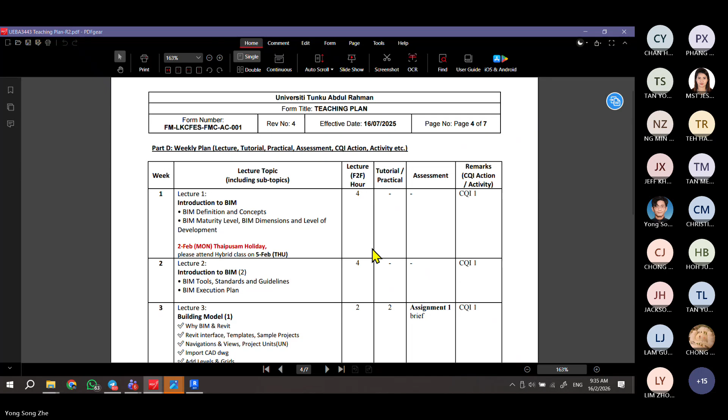Okay, so this is about our teaching plan. The topics are also written, I have arranged and written it in your teaching plan that is available in your Rebel. So today, week 3, here's some of the summary of some of the topics. Of course, sometimes you have some switching in between weeks.

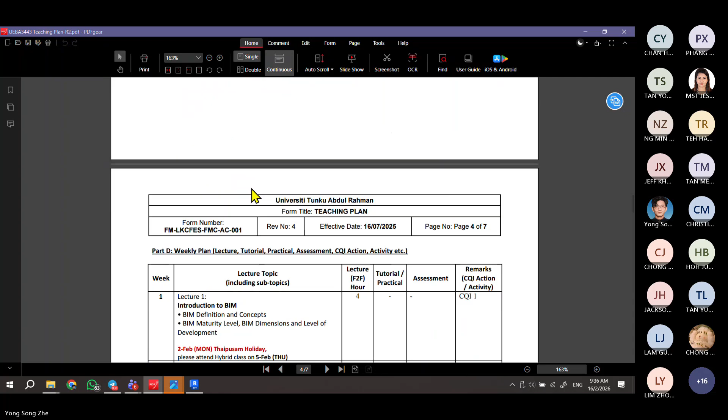So basically, in week 1, first class in week 3 and week 4, you learn about all the building basic modeling. Then week 5, you learn about roofing and more. Week 6 about curtain wall and system, the glass wall, and how to make louvers and so on. Then week 7, learn about staircase. Week 8 about site and topography.

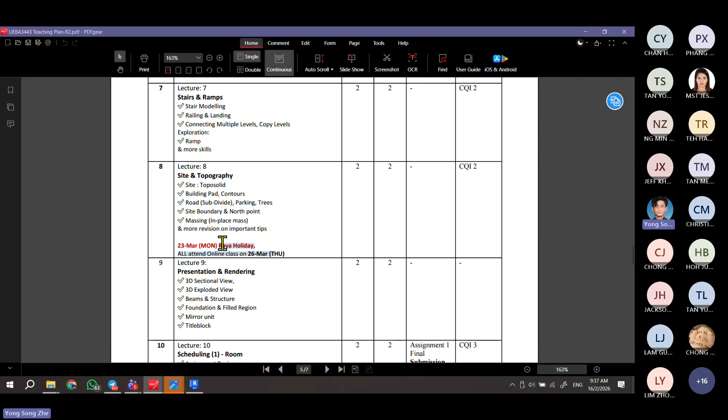So take note, in week 8 is our Hari Raya holiday for Muslims. So on that week, Monday, we are proposed to have no class, which is 23rd March, Monday. So every student on both Monday and Thursday groups, please join the class on 26th March. We will combine on Thursday online for both, similar like today, but combined on Thursday online. Please take note. And then week 9, we focus on presentation and renderings, which is on graphics in Revit.

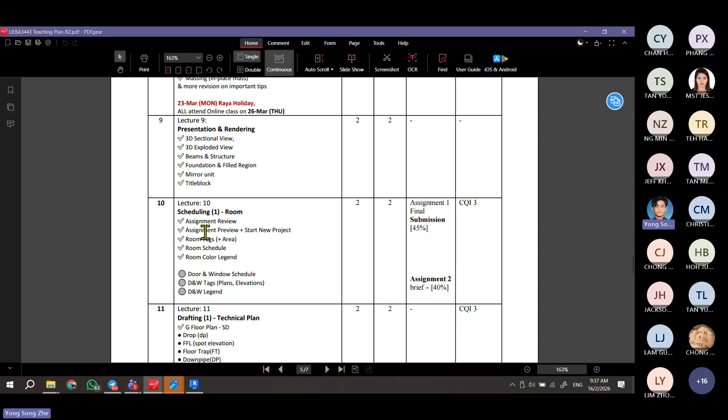Then week 10 will be starting your assignment. It's the end of assignment 1, it's a submission. And then we'll be starting assignment 2. Assignment 2 is about the technical part, documentation, technical drawings. So we'll be starting on scheduling.

Making all the tabulations of the data. Then week 11, your technical drawings, your plan, for submission drawing. And then week 12, other tabulations, your schedules, door and window schedules, the templates.

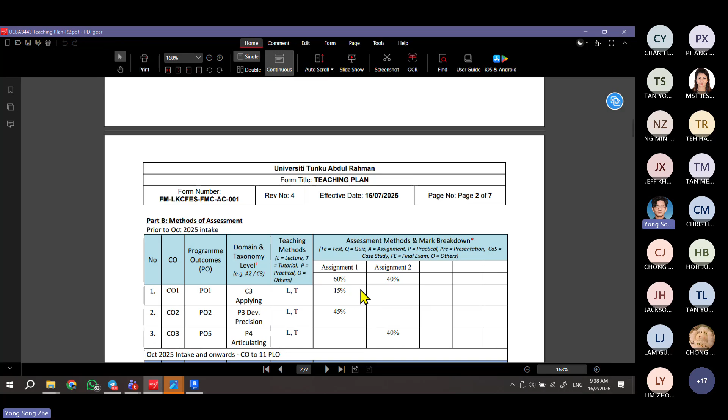Then week 13, about your construction details, and so on. Then will be your submission for assignment 2. So in total, you will have two assignments in this semester. Actually it's one, a good thing is it is continuous. You don't have to start everything from nothing, from new.

So assignment 2 is a continuation of assignment 1. But assignment 2 gives you an intro first, it is about technical drawing. So assignment 1 is more about design and modeling. Assignment 1 is broken into 2 parts, 1A and 1B. 1A carries 15 marks, 1B carries 45 marks.

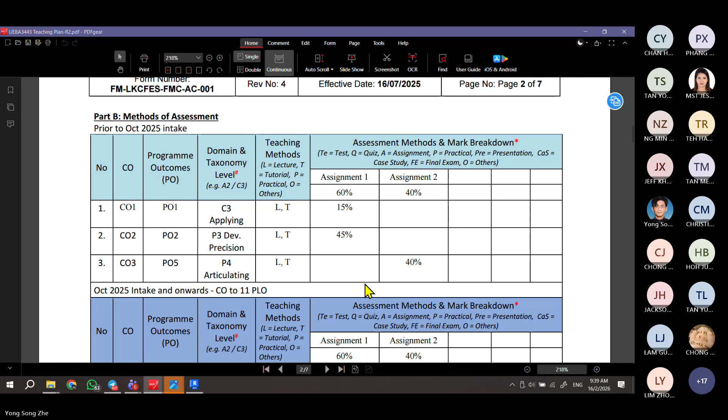1A is like a progressive marking. So I'll share more about the assignment brief later.

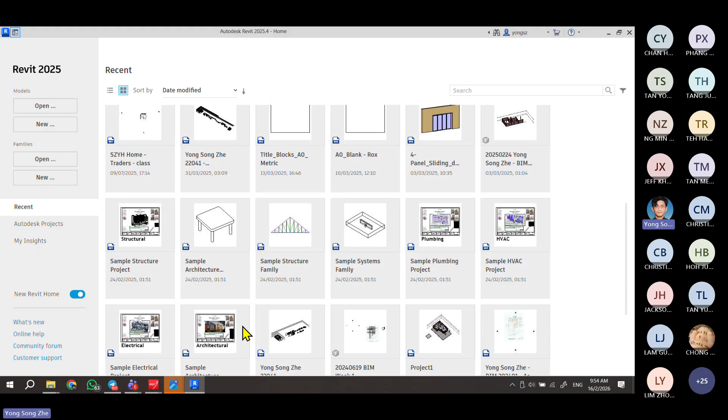So here I will show you some quick examples, a preview of what we can do in Revit. This is some work done by my previous students, your seniors from years ago. This was 2024, two years ago. So in Revit, we can do...

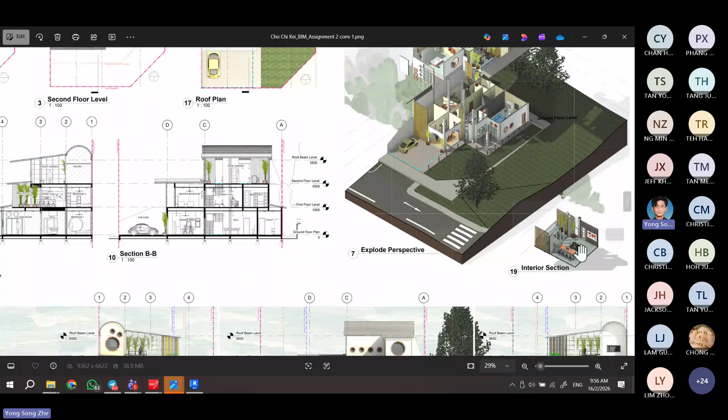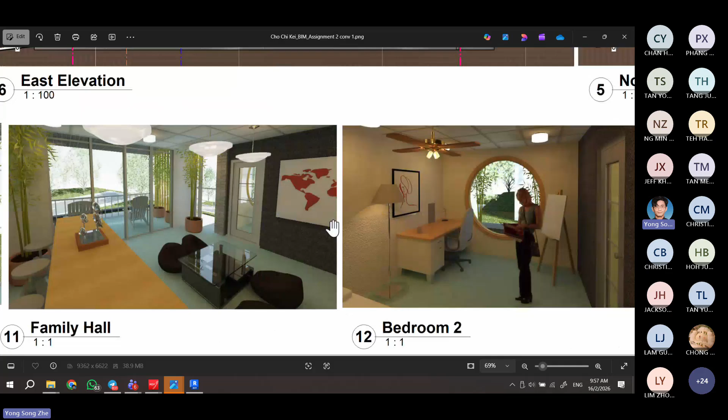This is what you learn in this course this semester, using Revit to produce this kind of drawing and 3D, including perspective renders. All this is rendered in Revit itself, it doesn't require any other software. No need for Photoshop, no need for SketchUp, no need for AutoCAD, just Revit in this case.

Another student's work here, an award-winning student. He won the Nippon Paint Asia Young Designer Award. This was one of his submissions during the BIM class, for our BIM subject assignment.

3D sections, exploded diagrams, you even can do the board arrangement, some board poster composition, the board arrangement, your poster A1 size board, all in Revit. So probably you don't need Photoshop. It has the basic functions. But of course if you want advanced editing, you go for Photoshop and others, but that's not necessary.

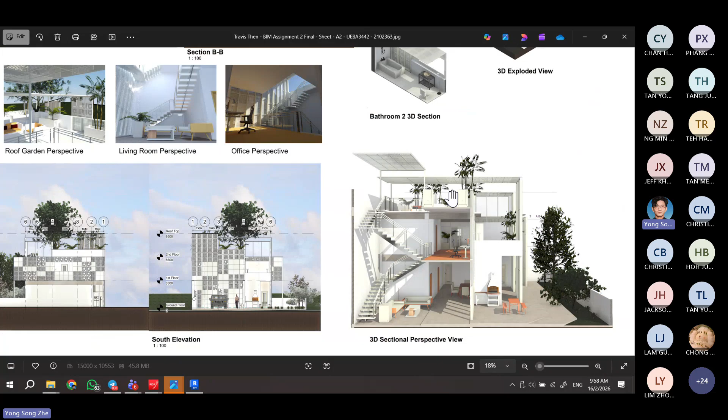Another student, also award-winning. He designed the facade, something quite outstanding, quite unique, different from others. 3D sections with good lighting, you can see. With design sense, it's not only a typical model, typical house with 4 walls, but you can see the space quality and so on. Very nice design facade.

There are many more good examples. I will show you in the upcoming classes when we come to that project. And this is just an overview.

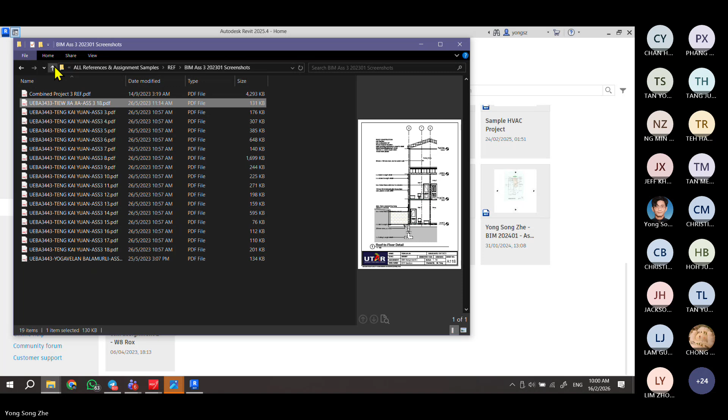For your assignment 3 later, from week 10 onwards is about your technical drawings and so on. This is a quick overview of what we will do from week 10 onwards: technical floor plans with all the specifications and the technicality of it, the symbols, the labelings, multiple storeys, roof plan, ceiling plan.

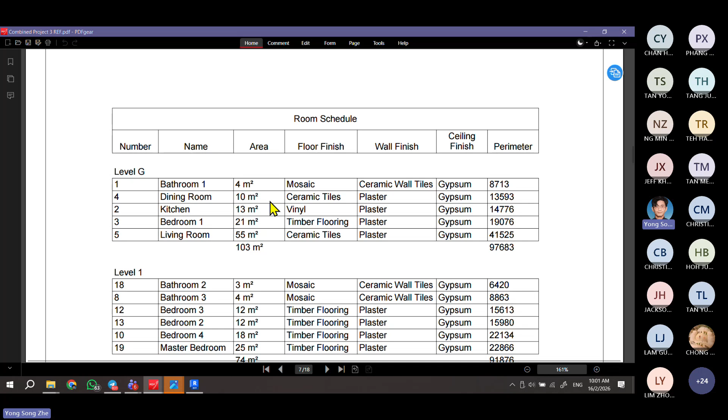We can do diagrams to explain the area, the room. We will be able to generate the room schedule, or the schedule of area, from our 3D model. So it means we don't need to type this and measure it one by one. In a few clicks it will generate this table, and the table will always stay updated based on your 3D model. You don't need to update the number manually.

Also schedules like door and window legends can be generated to tabulate the quantity of doors, windows, and all the components. Section, quite good sections, technical elevations, and you have a roof to floor detail, construction detail. We will do this by the end of the semester, around week 12.

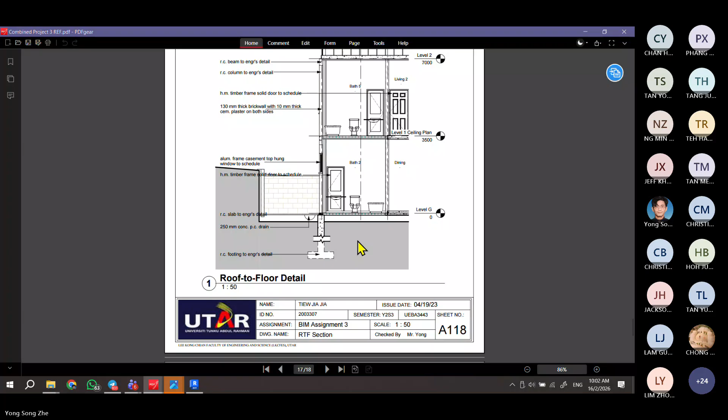Another example from another student: your roof to floor detail. All this is actually one project, one same building at one same site, so we just focus on different parts of it. Other detailing as well.

This is the way I like to share with my students, by the end of the semester of this course, what you will learn. Maybe even more than this, better than this. This is just some of the examples.

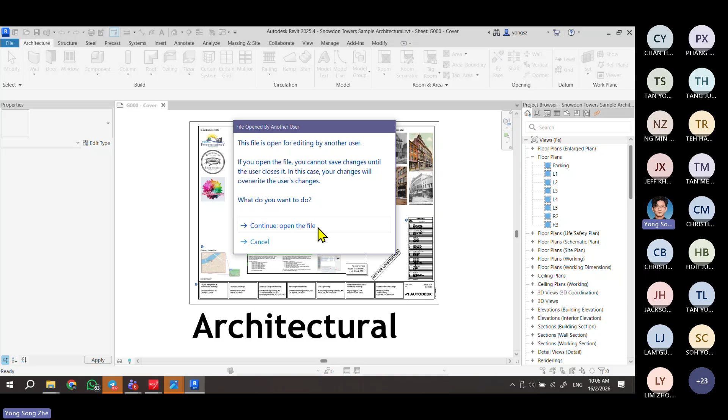It is a compulsory subject for architecture students in year 3. From 2025 onwards, based on industry visitation for accreditation, I was informed by the department that the civil engineering department wants to open this course as an elective subject for civil students also, because the external examiner or panelists asked why there is no Revit course, BIM course, for civil students.

So now, every semester, we open certain limited slots for civil engineering students. Our course will take examples most of the time using architecture projects, from the architecture perspective. So for engineering students, it will be fruitful, I believe.

In this semester, in your elective subject, you can have a different perspective. You will learn from this, and potentially you have more opportunity in the future. Maybe you're going to design partially or design your own project, maybe in future you get involved in some design projects potentially, and then you have the experience.

So from this sample project provided by Autodesk, we will just use it for testing. Firstly, I'm using my mouse to move around here.

If you look, you see you have a project browser. This is the project browser. So I will click and drag this, click and hold this, and drag it to the right hand side and release it, and then it will snap to the right hand side.

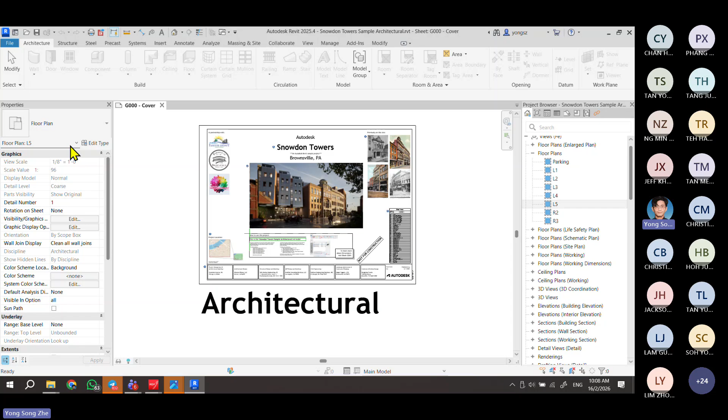Also, this is my layout, you can follow. So this is what if you have missing properties and project browser, where to find it. Let's say your project browser is missing, your properties is missing. Where to find it?

Go to View. You can see User Interface, this one near the last, almost the last button, User Interface. Then you can turn on Properties, there you go, and you can turn on Project Browser, there you go. So all the tools here at the top bar, we call this a ribbon.

Let's say your ribbon is missing. How? You go to View, but you cannot see the tools. So there's an up arrow icon here. You can click it a few times until it shows up all the tools like this. For me, I will keep this layout, this interface, so it's easier for you to pick what tools you want, and easier for me to show.

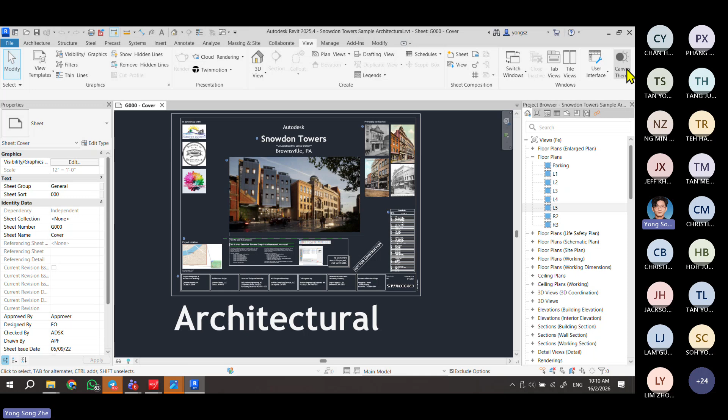Then we have canvas theme. Some students, yours is in a black color mode. So if you want to switch it, you can switch it here, canvas theme. This is just changing the canvas itself, black and white. If you want to change all the tools to a dark mode, you go to another place called File, Options, and then Colors.

This UI active theme, you can change. Let's say I change to dark. You can switch, maybe you feel dark is too dark, maybe you feel afraid of dark, then you switch to light version. Colors, like that.

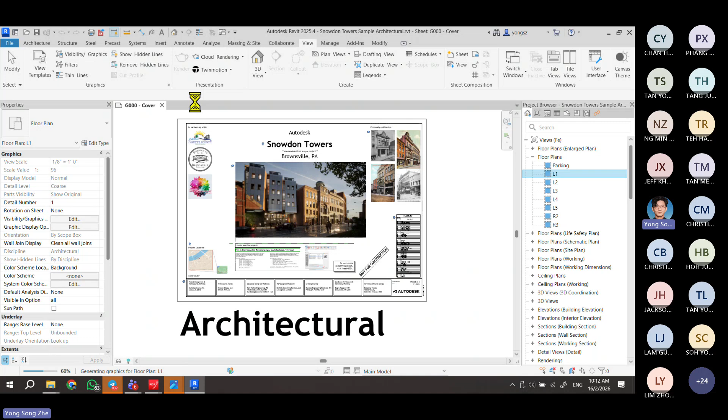So from the project browser, you will see, let's say, floor plans. You can, let's say I try with L1, so I double click this. It will open up a new window to show L1, or Level 1. This is about floor plans. I can expand or minimize this. You can try with other views.

Also, when you look at 3D views, you can open the last one, this one in the bracket, 3D in the bracket. This is the overall 3D view. Another shortcut to go to the overall 3D view is this button, the default 3D view at the top, you see a little house icon. So you can click this. Let's say I close this, I click this little house, it's a shortcut to go to the overall 3D view.

Okay, you will see other views you can try, like looking at sections, detail view, rendering, and so on. Okay, this is section.

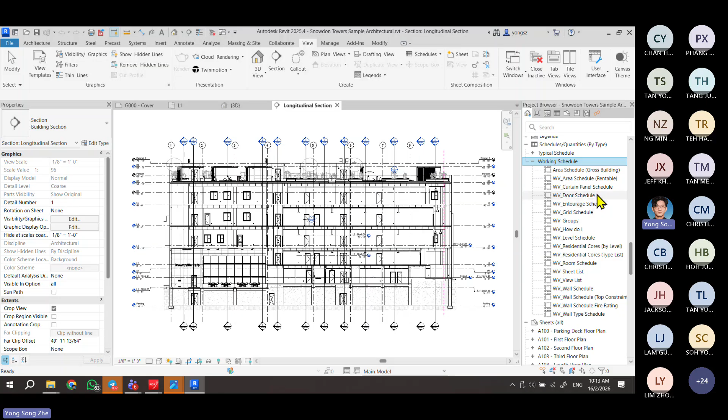Okay, you can look at the schedule also, like tabulation. Let's say area schedule, or door schedule, or the data, room schedule. Okay, and the sheets. This is about putting them, for the sheets, putting them in the A1 size paper, with the template, with your office template and so on, company template.

Okay, this is in A1 paper. So all views can be reached at the project browser. Okay, this goes to all the views, including, let's say, you have rendering views also.

Okay, rendered view. So let's say you have on many windows, you can click this expand button to see other windows that are hidden. Okay, if you have too many and you want to close all, you can just close. It doesn't matter, it will not close the whole project, you just close this view.

Just close this view. If you find that closing it one by one is time consuming, is there any way to close all of them in one click? Just one click to close all of them. Any way to do this? The answer is yes, you go for this.

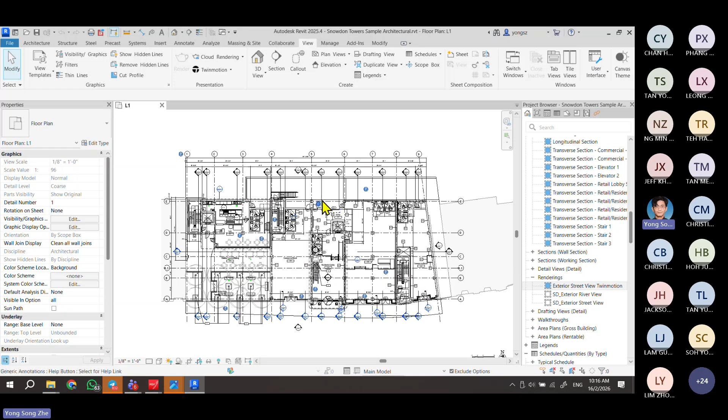Okay, so now let us go to, when I'm in floor plan, I use my middle mouse roller to zoom in and zoom out. To zoom in and zoom out, middle mouse wheel, the roller.

Okay, then you can hold your middle mouse button to drag to the left, up, down, left, right. We call this pan your camera. You can try this in 3D view also. So how to go to 3D view? I click this default 3D view at the top. Okay, so zoom in, zoom out using middle mouse roller, and then click the middle mouse to pan left and pan right.

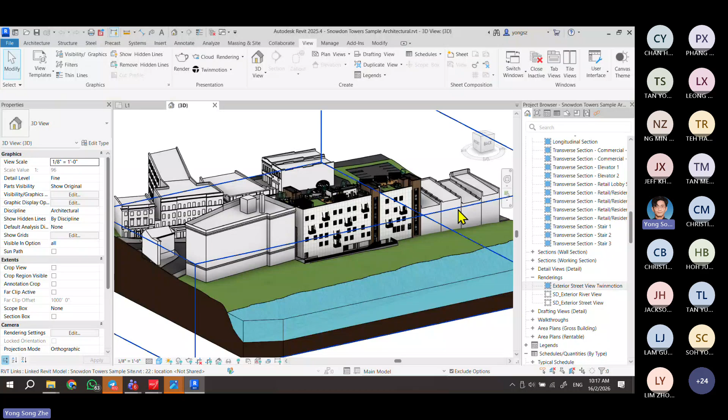So how to orbit, like move your camera around something. Firstly, you select one thing first that you want to stay at the center of the movement. Then you can hold the shift button on your keyboard, and with the middle mouse wheel, you drag it, the middle mouse wheel with shift together. Then you can orbit around. We call this orbit, you orbit around something.

Okay, let's say I pick one of the components, let's say a tree. I pick one of the trees. Okay, then I can orbit around the tree now by holding Shift and the middle mouse button.

Okay, now let's type UN on our keyboard. UN, United Nations, okay, UN on the keyboard. It is a shortcut to the project unit. So every time, as a good practice, we will check our project unit, whether it is using the correct project unit. Okay, so currently this sample project is using feet, not using mm. And so just for your information, for our project, we will use mm.

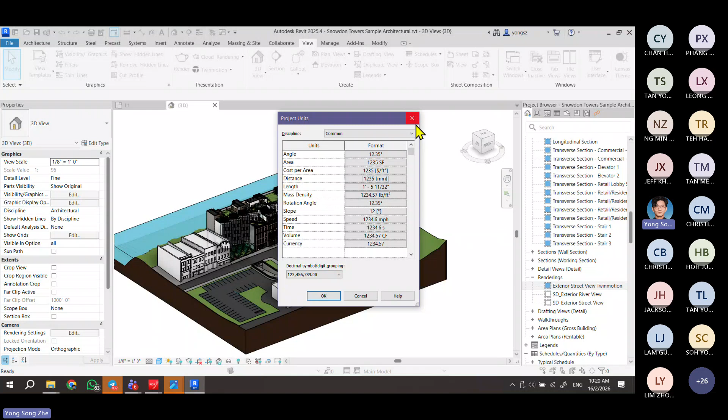In future, you can change it here. Okay, you can change, let's say, distance. You want to change it to mm, you can do it here in the future. Okay, decimal place, symbol is available here in UN, the shortcut key is UN. So during the class, I will share with you some of the shortcut keys that we always like to use, so you can take note, write it down for your future, you can use it, it's faster. UN, project unit.

Okay, so now I have, in this case, I will turn on my 3D views and my site plan view. How to go to site plan? Okay, you will see at the project browser here, there's floor plans, and in the bracket, site plan. So you open the site plan.

You want to test to move something and to split our screen. So other views you can close it. I just want to turn on site plan and the 3D view, two of these. Site plan and 3D view.

Okay, so for the site plan, you can turn on, currently you see it's just black and white, right? Okay, how to turn on color? You can go to the bottom left here, at the third or the second symbol here, second icon here. You click this.

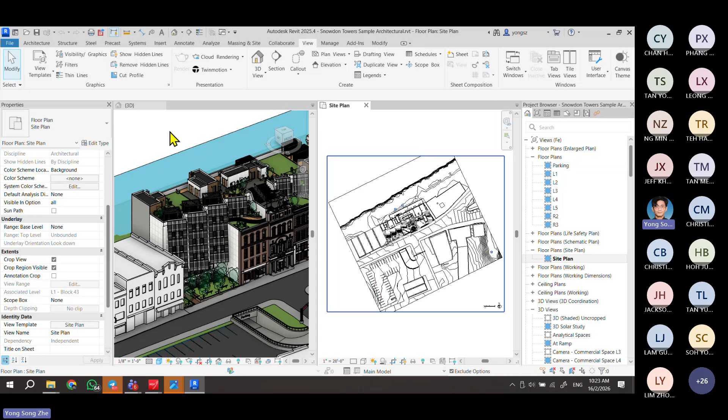Once you have opened this, maybe you have zoomed in too close already. So how to zoom up or zoom fit to the screen? Let's say you have zoomed in too close, or zoomed out too far away. How to zoom fit just nice to the screen size? The answer is double click in that window, double click your middle mouse button, then it fits to that window size.

One more time, I'll show an example. Let's say this drawing is too far away. It will zoom fit to your window size when you double click your middle mouse button on it. It is same as ZA on your keyboard. Z for zebra, ZA. ZA is the zoom fit shortcut key.

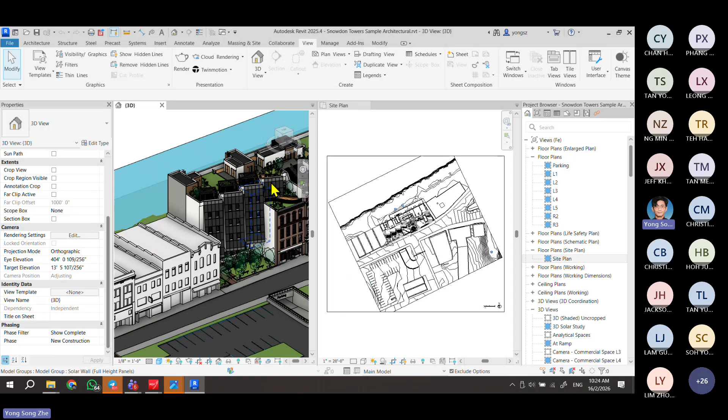Now I try to select one of the trees. When something is selected, it will be highlighted in blue. So for this tree here, I can zoom in on the site plan.

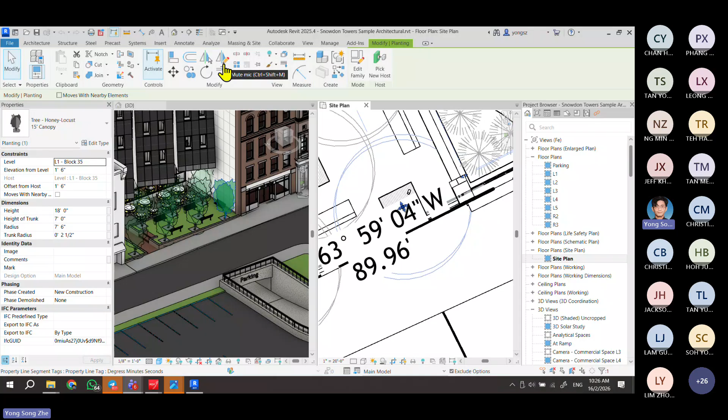So when I selected these trees in the plan, you'll see it's highlighted in blue also, in this circle line for example. So what if I move it? I move it in the plan. What happened in the 3D? I move this towards the road, so you can see in 3D it updates also.

What if I move it in the 3D? I move it in 3D, and in the plan it will be updated also. So this is synchronized. I will not move other things first.

Because we will cover this in a future class. So when you select anything, it will show its properties specific to that thing. Let's say I select the whole...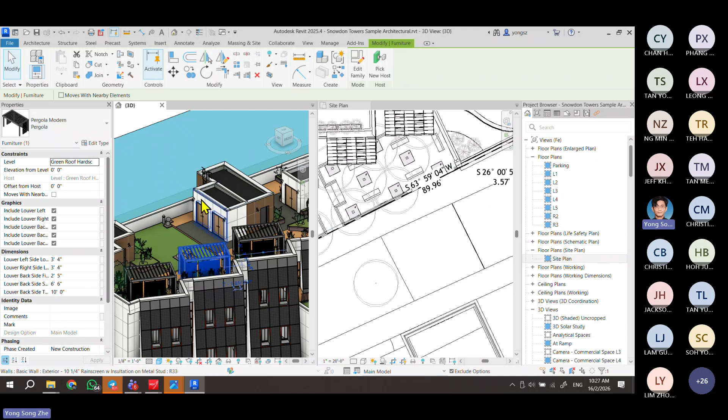I select the canopy, the pergola, so it will show the properties of the pergola. I select the wall, it will show the properties of the wall, depending on what I've selected. So the properties keep changing. I select the trees and the shrub, it will show the shrub.

When I select nothing, I just click the empty space, or press escape, I select nothing. Then it shows the properties of this view. Let's say the active one is the 3D view. When I click this, this is the active one, then it shows the properties of this site plan view. When I'm selecting nothing, it shows the properties of this view.

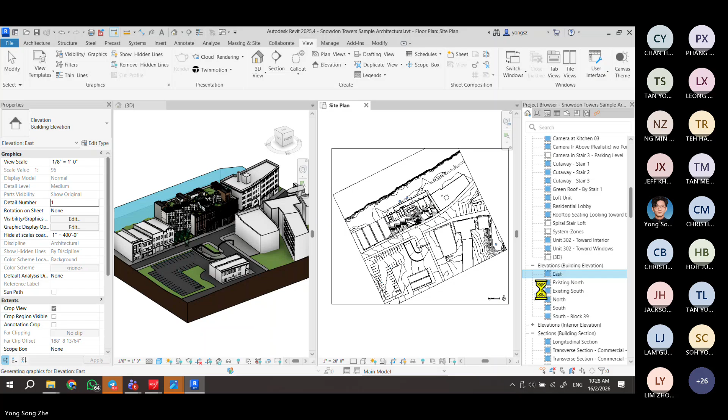I'm trying to open another view now, let's say the elevation view. You can see it open up here. If you want to combine them, don't want to split it, you can click TW. I will ask this in next class, so remember to answer it fastest next class.

So yeah, we see the leveling line and so on in the elevation view.

So next we're going to start a new project, a blank project soon now. So we no need to save this, I can close this.

Before we close this, one more thing. Let's say I'm in my 3D view. Currently it's a color view, you can see the color. So what if you want to change it to black and white?

You can look at the icon I introduced just now. The second symbol here is a cube. You can click this and say hidden line, then it shows just black and white.

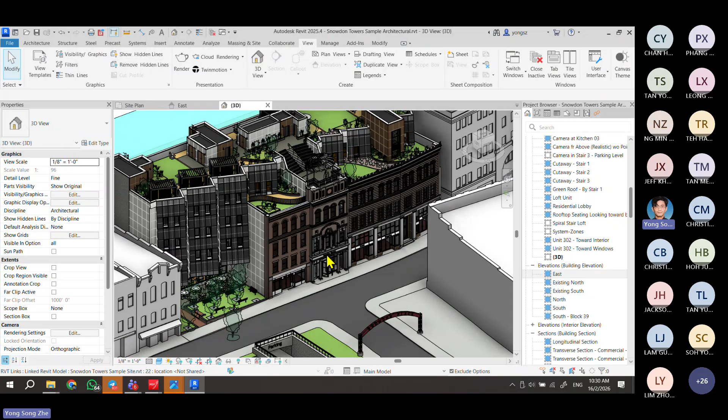If you go for texture or realistic, if you give more realistic texture to your material, like maybe your brick, you can see when you zoom in, you can see the texture of it. Maybe your concrete or your grass, you can see the texture of it. When you are using texture, your timber, flooring, and so on. This is texture view.

And you can switch it here for your 3D views. You can turn the shadow on or off on the fourth icon here. Currently it's on shade. I think the shadow you can try.

This is shadow on. You can see there's darker tones of shadow here. This is shadow on, and this is, I click this once again to turn off the shadow. This icon.

Okay, not the third one. Third one is sun path. If you accidentally turn this on, you can click it once again to turn it off for the sun path.

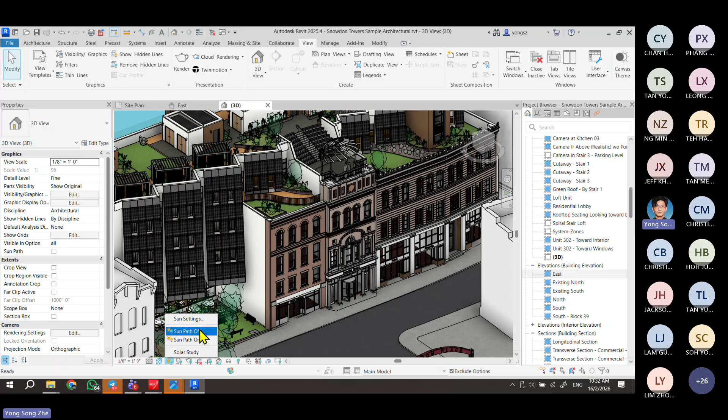Okay, now we don't need to save this. I will close off them. To close all inactive views, we can click this. And then we click this once more to close the project. Okay, I say no.

So now we'll start our new project. I will send you an image here. Send now. Okay, I've sent you in the Telegram group an image, a JPG file image. So everyone, please go download it because we're going to import this drawing into our Revit to start our project, our assignment from nothing.

From blank, from a new project. Okay, so I have closed the project just now. We are here. So now let's start with, we go to new, you create a new project. Choose the models, new models, not the family. Not family. New project, new models, this one.

Then under here, new project, you go look for the architecture template. If you did not find the architecture template, you can look for the default template or metric template. Metric, make sure you choose the metric if you don't have the architecture template.

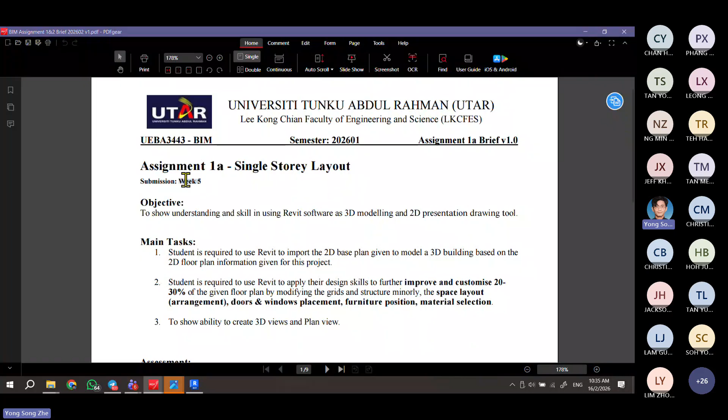Okay, so here I introduce to you assignment 1, part A, part 1A, assignment 1A, the first part. I will share this brief with you in the group later. So for assignment, you have in total assignment 1 and assignment 2, two assignments as I introduced just now. So for 1 you have 1A and 1B. 1A is a progressive marking back, so it will be assessed, I think, in week 5. If no issue, then assignment 1 is about making a single story layout.

So what is that? So you know that when you come to work in the industry, one of the projects you might frequently be involved in is residential projects. We know that everyone is aiming to buy a house and so on. Someone even has more than a house, a few houses. So housing project is one of the most highly demanded. We will learn on this, get introduced to this, get involved in this kind of project, housing project.

So 1A is doing a single story layout first. Student is required to use Revit to import the 2D base plan given, to model a 3D building based on the floor plan given. So the 2D base plan is the one I shared in Telegram.

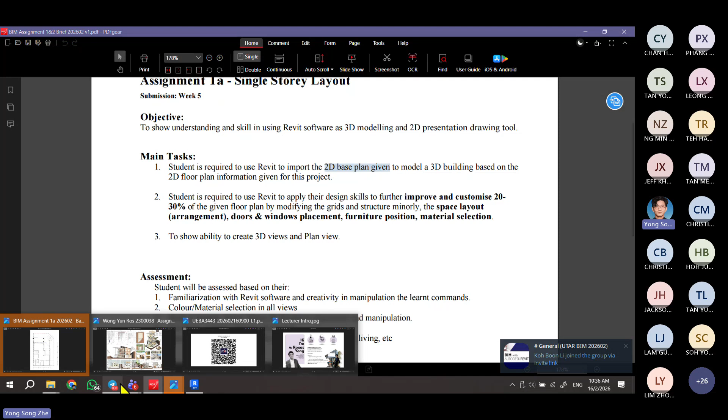This one, the 2D base plan. This is the base plan. This is unfinished drawing, done halfway, maybe not even half. It's done partially only. So you will continue it, like connecting the lines, continue the drawing, continue the design.

So point number 2, student is required to use Revit, take note, use Revit, to apply their design skills to improve and customize 20 to 30% of the given floor plan. So you are required to improve or continue to develop this unfinished drawing, like 1/3 of it, almost 30%, 20 to 30%, including by minorly modifying the grid and structure. So you need to improve the space layout, the arrangement of the space. You're going to decide like where's the kitchen, where's the toilet, all the necessities of a single story house.

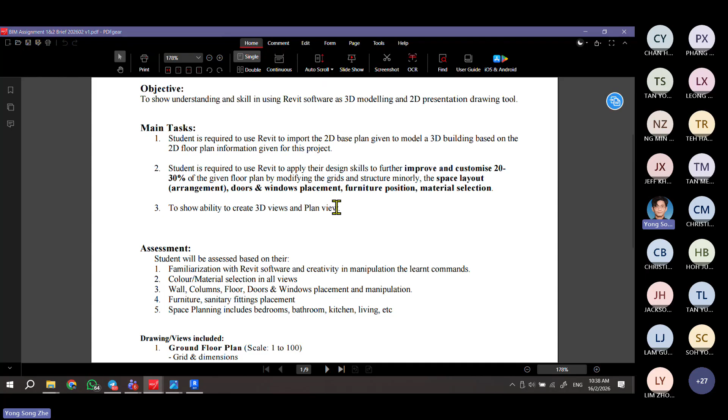Okay, you have bedrooms, living room, dining area, and so on. Space layout, you're gonna define it because in this plan given, it is not defined yet. So it's left to you. It gives rooms to you to define, and then positioning the furniture and selection of material. This is included in the main task. Then you create 3D views and plan view to show your idea, your design.

So students will be assessed based on your space planning, like positioning of your bedroom, bathroom, kitchen, living area, and so on, or the necessity of a single story house, and then your furniture placement, and your wall, column, floor, door, and window placement, and your customization, your manipulation of it. Does it follow the proper size and so on? And then the color and material selection of your views, your 3D.

So these are the things that you're gonna deliver. So we will assess this. You will submit this by week 5. Okay, so you have 2 to 3 weeks time, by end of week 5.

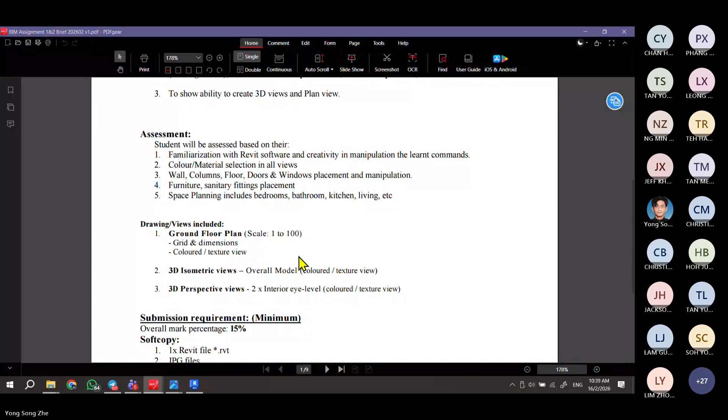So you will submit your Revit file in the format of RVT. The proper format of Revit file is RVT. Take note. And the JPEG file, the image file of the 3D views. I will talk about this in the upcoming classes, isometric and perspective views. I'll talk about this more later.

The rendering is not required yet in this submission, so it doesn't have to be realistic visual and so on, no need first. The roof and ceiling is not required yet in this submission. Fencing, site context, landscape is not required yet in this submission. That all this will be in the second part of the assignment, Assignment 1B. Assignment 1B will need this. 1A, all this is no need first. Okay, in these reminders, take note.

Okay, so let's go to our base plan to start. Make sure you have downloaded this.

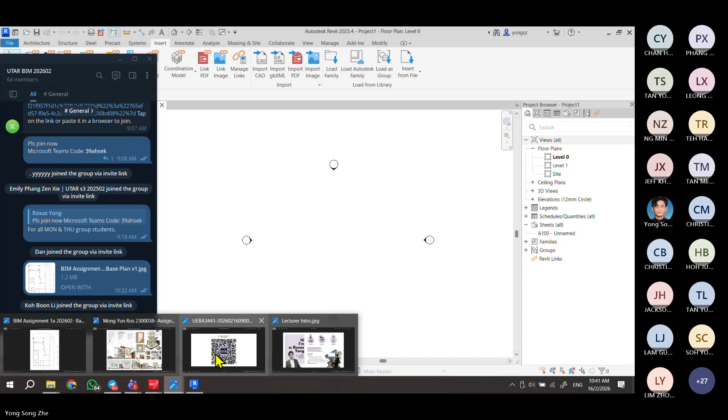Firstly, I will go to Insert, and then Import Image. So how to import a drawing, let's say it's in image format, into Revit, like this image drawing. Imagining you are working in a company, maybe during your industrial training, or when you get graduated.

So in the company, the boss tells you—let's say boss says, hey Junbin, for example—so we got a project, a Revit project. You know Revit, right? I saw in your CV during the interview, you say you are good in Revit. So we got a project. The client have the building partially done. Now they want to do the project, it's kind of abandoned. Now they want to continue the project, continue developing it or renovate it. So this is the current measurement we have, or current layout we have, done partially by other colleagues maybe last time. So now you're going to continue this project to finish it in Revit.

So this is the clue. This is the drawing that was given. So we're going to continue from here. So here comes the beginning of this Assignment 1A. This is a very realistic project, practical. So make sure you equip with the skills and you come to work soon in the future.

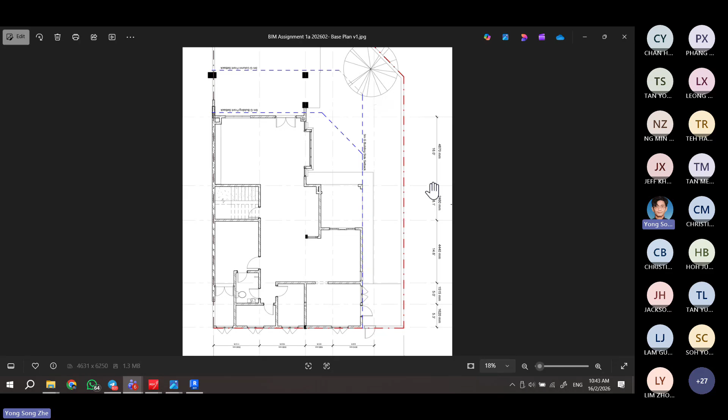So the measurements are given, so you can do minor adjustment, as written in the brief, 20 to 30%. So how to import it into our Revit? First step, let us go to Insert and then click Import Image. Then you go to find where have you downloaded the file.

Okay, I know this is my base plan. So I will copy this address. I click here, copy this address, and I paste it here. I click enter, so it brings me to this folder. And then I select the image, the JPEG image, BIM Assignment 1A 202602, this semester intake, and then base plan version 1. I say open. Then you can place it, click to place it somewhere near the middle.

Okay, then before you start anything, go to type UN on your keyboard, check your project units. UN, for United Nations, is shortcut key for project units. Check your distance or length, let's say length, whether it is in mm, correct. Yeah, decimal symbol is optional, up to you. Area is in meters, square meters, with the symbol. Others can remain, just check, is it in mm or meter. We want to use the metric system. We don't want to use the imperial system, we don't want it in feet or inch.

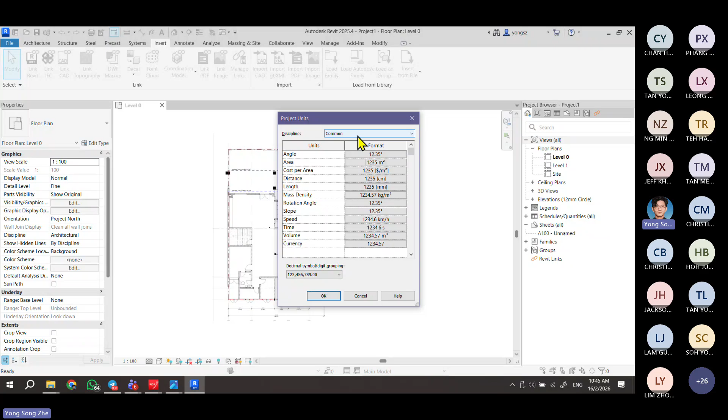Okay, after you check project unit, then what is next?

Okay, we want to start to trace or model it.

But however, when we want to trace or model it, we will find that we don't know whether this image, because it's a JPEG image, whether the size is correct, the scale is correct.

Because this depends on the resolution. If it is a HD image, then it's very big. If it is a low res, then it's small.

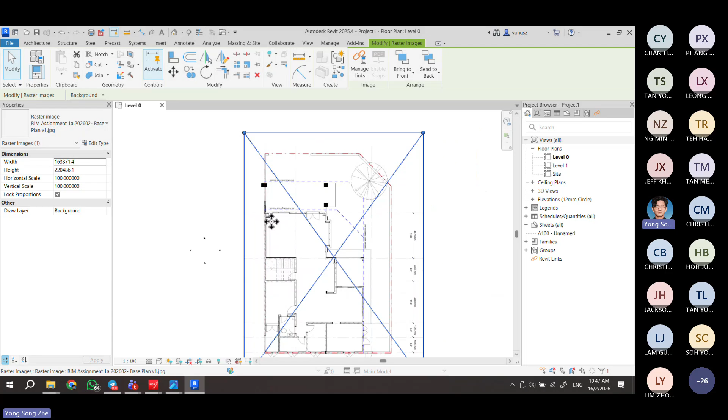So now we're gonna scale this image, how to scale it. You can just ignore the bubbles first, this icon. I drag it to the side. I want to scale this image, make it correct to scale first. So how to scale the image?

Okay, firstly, I will take one of the longest measurements for reference. Let's say this 13826 is upside down. So I want to draw a line that is truly 13826.

This is step number 1. Draw a line that truly follows the measurement. Okay, how to draw a line?

You use a command called DL, donkey donkey line. DL stands for detail line actually. DL is used to draw a 2D line.

A 2D line is the same as if you go to Annotate, then detail line, it's the same thing. The shortcut key, as you can see in the bracket, is called DL.

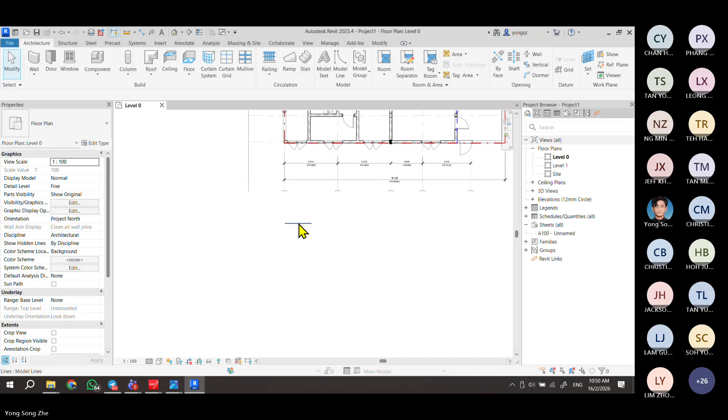Okay, then I move this to the beginning point of this. You can use your arrow key, the up, down, left, right button on your keyboard, the arrow key, to move it.

Okay, so I want to align the starting point with this line, as close as possible.

It will not snap to it because this is an image, but I can make it as close as possible. So you can see the green line a little bit is actually here, from here to here, the green line, my model line or detail line.

Okay, so I have done step number 1. I drew the line and positioned it here. The starting point is aligned.

So now step number 2. I will go to click Modify under the Modify tab, this one. Then I click the scale button, this one.

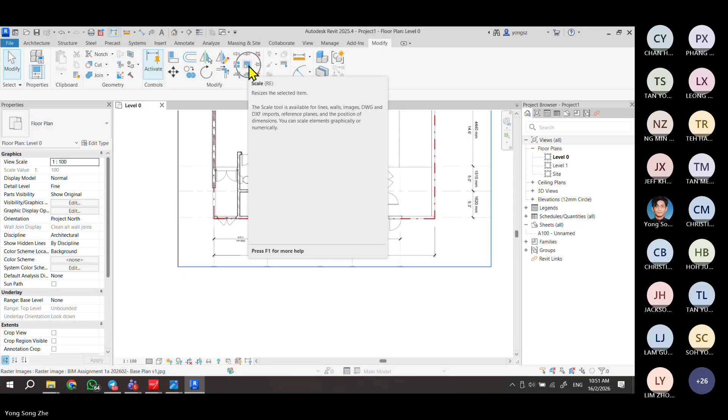Somewhere near the middle here. So I click scale, and then...

You pick the starting point. Okay, sorry, you pick the image first before you click the scale button.

So I select the image. The image now is in a blue bracket. Okay, then I click the scale button.

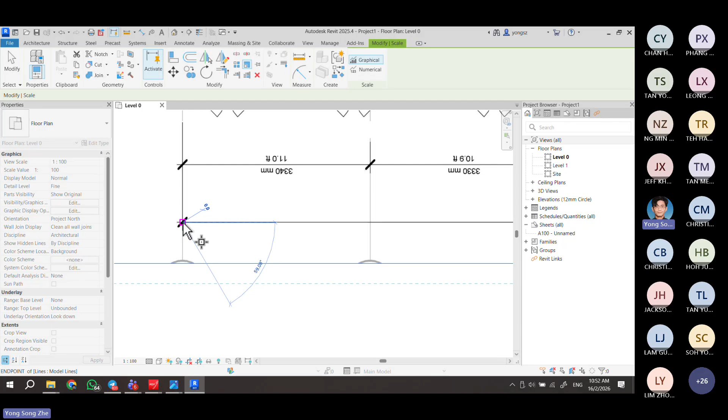Okay, then we choose the starting point of the line we just drew. I click here. Then I click a second time where it stops, based on the image.

Okay, based on the drawing given, it stops here. I click this for the second time, and I click for the third time. The last time is the actual measurement, 13826, here.

My green line actually stopped here just now, so it will snap to it because this is a line I drew in Revit itself. Okay, so I click here. So 3, 2, 1. So this happens.

Now the drawing is scaled down, reduced by its size. I press Control Z - before is this. After is this, okay. You can use Control Z to undo, Control Y to redo.

Now when I select this green line - I know it's a bit hard to see, it's thin - this green line is the same length with the drawing given. So this drawing is now to scale already. From this point to this point is correct, 13826.

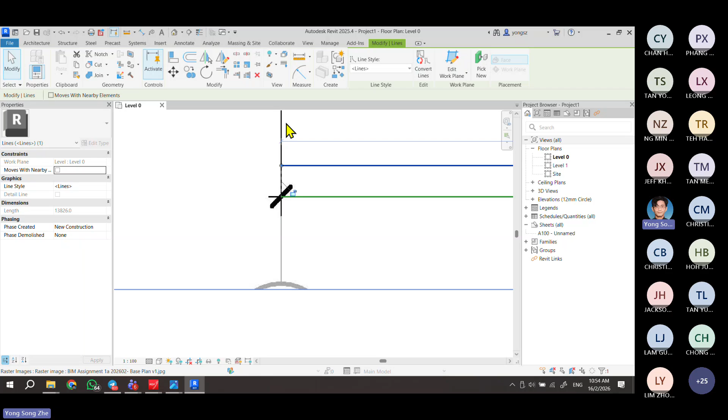Then you click to start, and then you type the measurement. Let's say 13826, you click enter. Then you select the line, click to select, and move it to align the starting point with the grid, the first grid here. You put it in position.

Then you select the image, go to the Modify tab, click the Scale button here. Then you pick the starting point, pick the ending point in the reference image, and then click the actual ending point of your line. Then you have scaled the image properly.

So now everyone is given 5 minutes to try this on your device. Okay, please try. If you have any issue, you can ask at the chat box now.

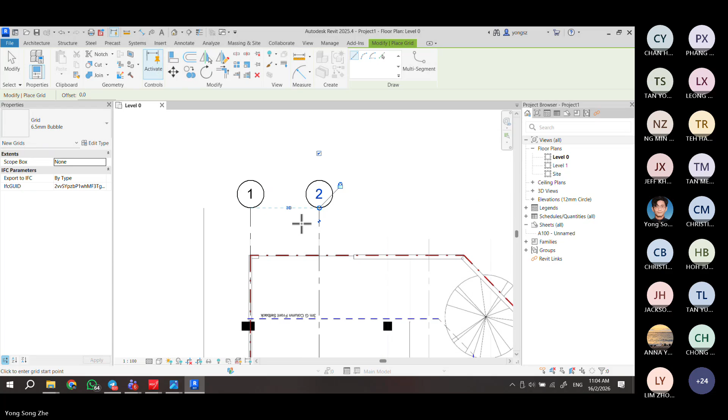So the bubble will happen at the ending of it, in this case. Okay, so you continue your part. Then same for the horizontal one. So I click.

For the horizontal one, you can name it - let's say the other side you can name it following alphabetical order. Then repeat again - here, go for B, C, D.

For grid, actually you can use the copy method also. You can select and press CO on your keyboard - CO stands for copy, same as this one in the Modify tab. You can press CC or CO, either one. Then you click to move, and then click one more time to stop it.

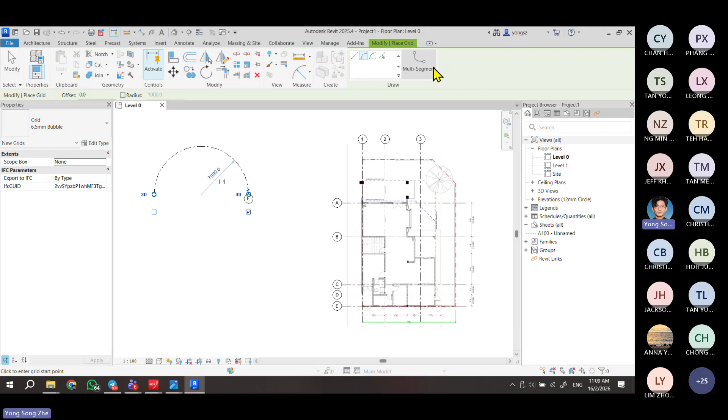When you are drawing grid, you can see not only straight grid - in future maybe curved grid is used in some of your own projects. There are also multi-segment grids. In some cases, you can see grid that has some angle.

When you move your mouse near the tools, there's an introduction brief, a preview. So this is an angled grid. I can click this, and then click finish - every time I need to end editing with the finish button here, the green tick, to say yes, to finish edit. Otherwise it will remain in the editing mode.

So this is angle grid for the future - maybe it's not used in this assignment, just for knowledge.

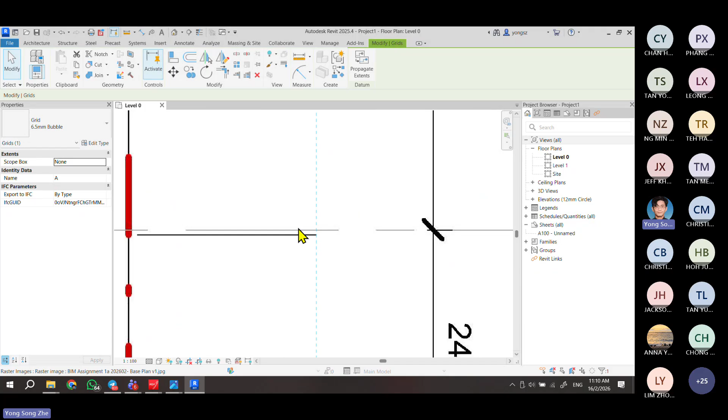Next is about the measurement. So we already drew the grid, but we're not sure if it's accurate. Sometimes we have some inaccuracy, right? In this case, I just need to position my very first line as accurate as possible. I zoom in, and then I use my arrow key to slightly move it, to make it as accurate as possible. Then the subsequent line...

I can show how to adjust - let's say line B. In this case, I have fixed my line A position as correct. So I choose my line B, for example.

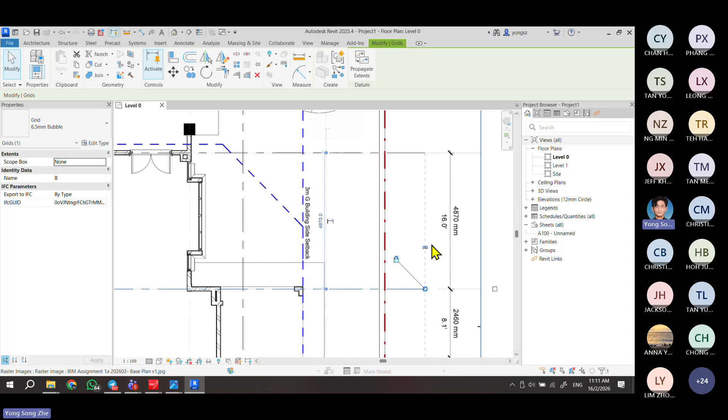Now, when I'm selecting my line B, you can see there's a blue number here. This is the current measurement. We can click the blue number. When the number is in blue, we can click it and change it to the actual measurement, 4870. So I click the blue number here, then type 4870, enter. So to change it, now it's precise to 4870. Same goes here.

Here they are supposed to have a grid, but without a bubble. So I will add one more grid, but without a bubble. Somewhere here, I press escape, then I can click this. I can click the handle here to extend it. Then I can click this tick box to remove the bubble.

Now I click grid B, grid B, grid B - sorry, you click the new grid that you have drawn just now. Then you can see the measurement here again. When you want to move something, you select it, then it will show this blue dimension, blue numbers here. Then you can move it.

When you change it, this line will move. The other line will not move. It only moves the line that you have selected. So I select this line, it will move this line. So let's say here, 2460 - change to 2460, enter. And then the subsequent one, I need to select this line because I want to move...

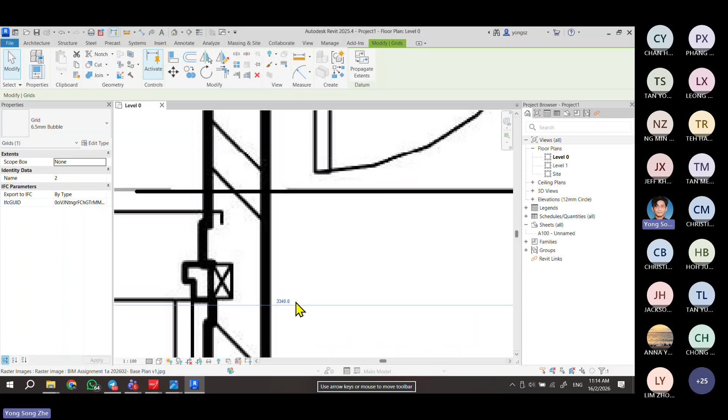And then the second one is supposed to be 3340. So I pick this - 3340 is already accurate, it's correct, 3340. How about the third one?

Now you need to sum up this - sum up this and this. So you do it accordingly. I will not repeat every step in detail, it will take a long time otherwise. So you do it in detail. Assuming my grid is done, it's finished.

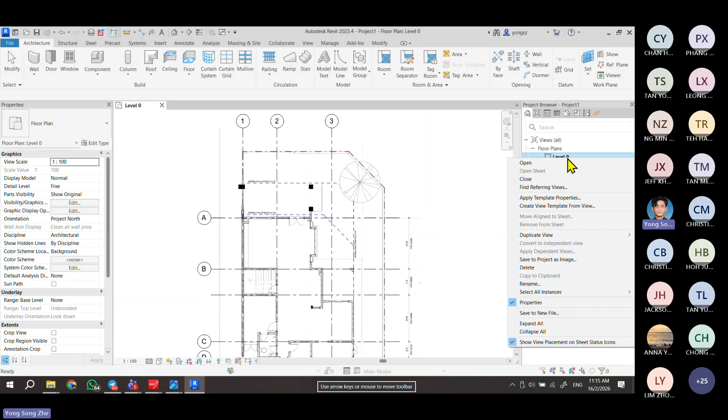Next, you will go to rename your level 0. In Malaysia, we will not name it as level 0, we will name it as level G. So you right-click the levels at your floor plan here, rename it, say level G. Then you click enter.

It says, do you like to rename the corresponding level and view? You say yes, so that in section elevation, all will follow the naming as level G. So we say yes here. Level G now - you can see level G. I don't want to see level 0, and I don't want you starting with level 1. We do it in the Malaysia context, start with level G.

Okay, then now you can look at the elevation. Let's say we go for east elevation. Yeah, you can see level G, level 1.

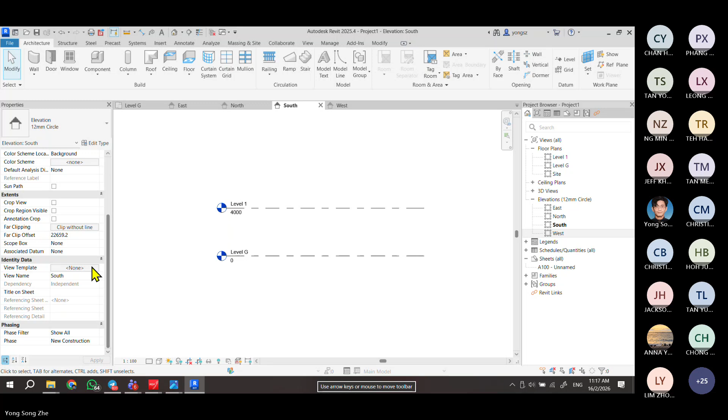Okay, now in the elevation you can see the leveling line, the existing leveling line. For how high you want each level or your wall to be, here you can change it. The existing one you can see is 4,000, but maybe your project you want to make it 3.5 meters. Four is quite high actually.

So to change it, in elevation view, any elevation view, I pick the Level 1 line for example, then I click this number. I can change it to 3500. I can click this number here also, double click it, say 3500, enter. So now my floor to floor height will change to 3.5 meters in every elevation. You synchronize.

How to add dimension? To add dimension, you can click this Align Dimension. This is a shortcut key, align dimension, or it's the same as going to Annotate, Align is the same thing, align dimension. This is here a shortcut.

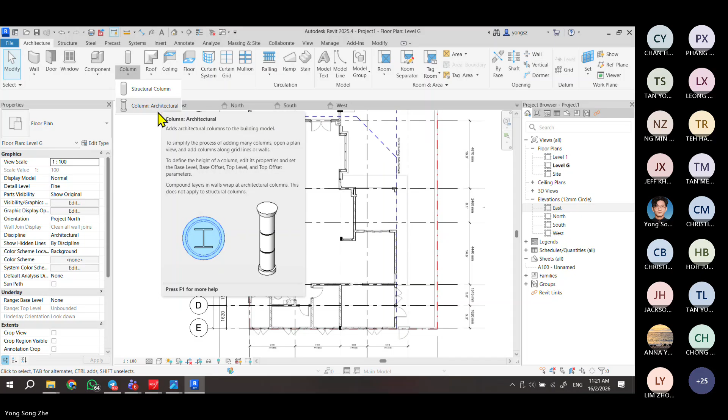Okay, next, assuming we have done the grid and the dimensions, next we're gonna start to add column. How to add column? So for column I will go to Architecture, Column, and then let's go for structural column first. Structural column. And take note that this is an RC construction building using reinforced concrete.

So in this case we'll use reinforced concrete column, RC column. But when I go for Architecture Column and Structural Column, I see no RC column here, there's only an I-beam column, a steel beam, a steel column. So how to add more varieties here? How to find the RC options here?

In this case, we go to click Insert Load Family, this one, Insert Load Family. When you are in Insert Load Family, it brings you to a folder called the UK folder. And here, when you go to this, you can see many folders, and you find the Columns folder here. I click this, and I'm looking for this one, rectangular column.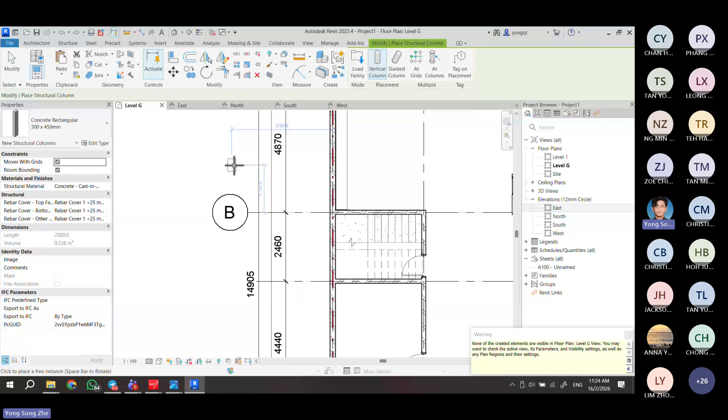Here, let's say I start from rectangular, then I say Open. Then now when you expand this, you can see you have concrete rectangular column here with a few options of dimension. Let's say I choose this, then you can see I have a column icon here. I just place it randomly first outside. Control Z. Yeah, I place it here. Not visible.

Okay, yeah, I found some issue here, we identified some issue here. Previously we see there's four bubbles here, right? So just now I tried to put in the columns and the grid, but I can't see it in the elevation and so on in other views. So now we are trying to fix this.

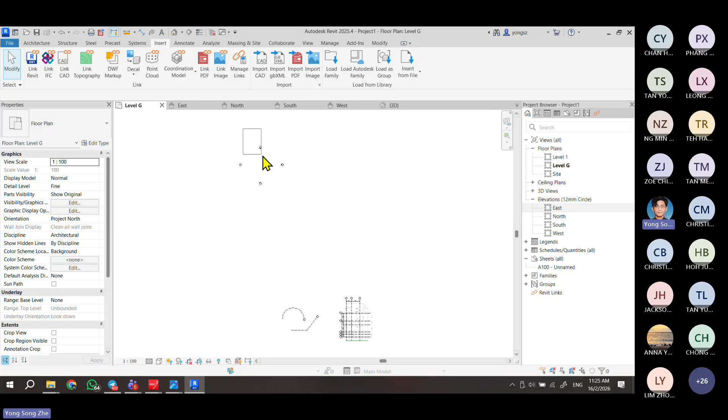Okay, so now I will move my bubbles. There are 4 bubbles here. I will move all of them around my building. So how to move this? I click to make a bracket, click and drag to make a bracket, and then move this to the top. One more time, click and drag to make a bracket, then move this to the right hand side. I click and drag to make a bracket to the left hand side, and same to the bottom one.

So these 4 bubbles must be around my building, outside my building. When you select, make sure you don't select it by single click, because you will miss something, there are some hidden lines and so on. So you make a big bracket to select it.

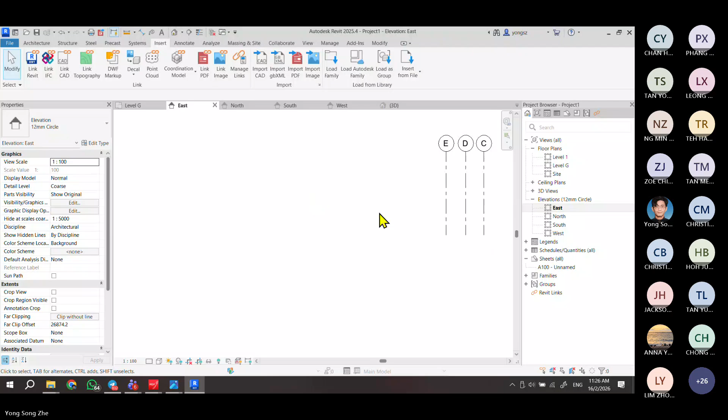So now when you go to your elevation, you should have seen the vertical grids and so on, and the columns you can see now. Okay, for the leveling, I will go to the 3D view. I will expand this and move this here to our area.

So then I will align the lines in the elevations. I will align the lines here, like handles.

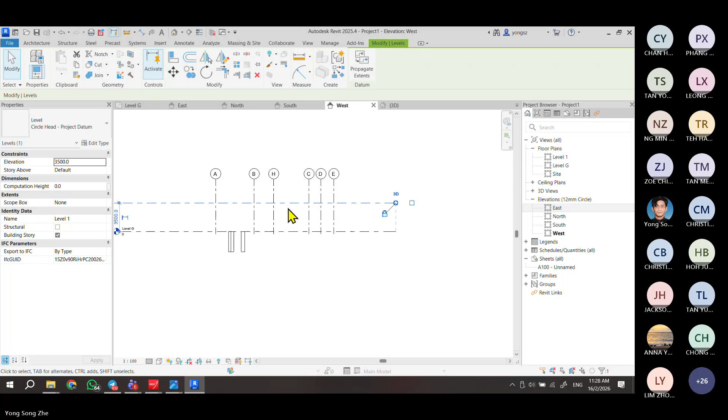Go to each of our elevation view, and you can adjust the leveling line and the grid line so that it's proper, something like this. Both level G and level 1 is aligned, and you see the vertical grid line now.

So when I'm in my column here, just now the column can't be seen. Why? Because I go to structure, column, then to architecture, structural column. I choose this concrete rectangular column. Here I need to change it to height, otherwise it goes underground. I change to height, just now it was in depth. Then I go to connect to level 1, otherwise it's undefined.

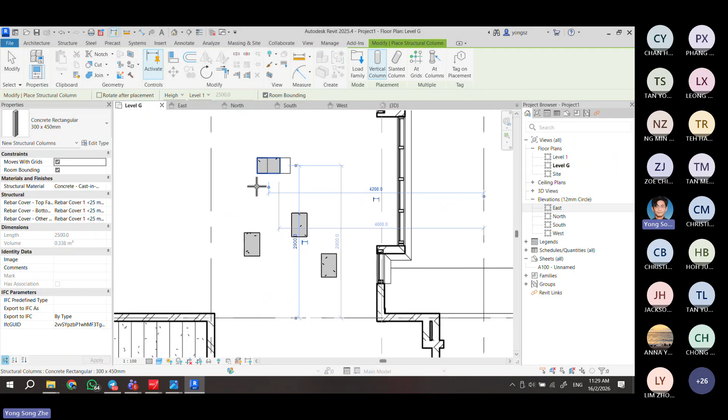So now I can do the placement of my columns. You can visualize it here. The placement of column I just randomly place first. Or you can hit space bar on your keyboard to switch the direction of the column. You can't see the color yet, right? If you want to visualize the color, you can change here at the second icon to shaded. Then you can see it in gray color, it's more easier to identify.

So if I want to place this column, it will seem too big, right? Seems too big to put it in the wall, to flush it in the wall. So how to customize the size of my column?

Answer is we go to edit type here. Edit type, we can customize the column size. Click edit type, and then here you can see the dimension. But before we change, if we change it, we will override this. They all will follow the latest dimension.

But if I don't want to change this, I want to create a new type of column. So how to do this? We'll click duplicate, to create a new type so you don't disturb the existing one. So we create a new type by clicking 150 by, let's say, 300. And then you put your name in short form. For example, everyone needs to follow, put your own name in short form, because when you submit your Revit file, we might check on this, whether you did the naming correctly on your own.

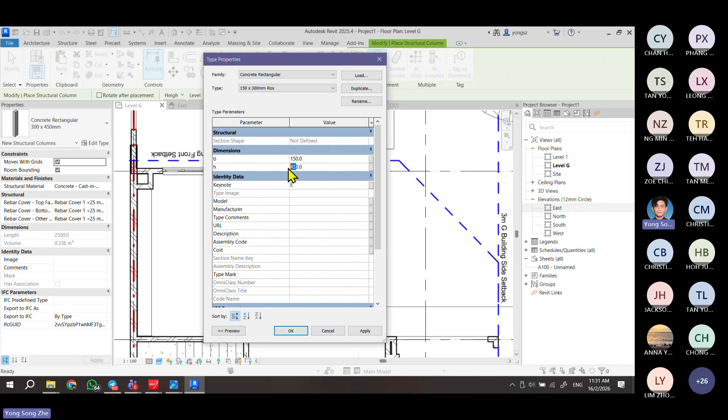Then we say okay, so you have just done the naming of it, a new type of column now. You have named it, put your own signature, your own short form of name here. Then now you change the measurement accordingly. Let's say 150, so that it's flush with the wall thickness, and then by 300. Then we say okay. So now you can see when you place the column, it's in this size, it's smaller, right? It's 150 by 300. As you can see, the options is here, you have just created your own option.

So now the next step is to place your column accordingly. One of the tasks for today's class is make sure you have imported an image, drawn the grid accordingly, and then place the column and the wall as well, column and the wall. So you can see my column is placed here, for example.

Okay, one more example, maybe my column is here. So you place in your column accordingly, completely. I'll not show every detail, every step, in the class. You continue it yourself. Yes, I will delete it.

Okay, next task you need to show. You have your columns done, placement. Then is your wall. How about your wall? How to add your wall? Once you have done your column, how to add your wall?

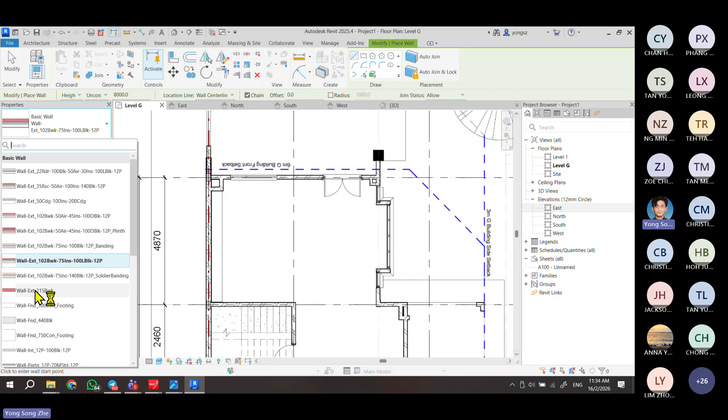Let's say an external wall, this one, 215. I just pick a wall that looks simple, wall external. FND is foundation, so don't pick it. RET is retaining wall. So go look for an external wall, EXT, but it looks simpler in layer. No worry, later we'll modify it. So I pick this wall. If you draw, you can see it's in red, and you can see the layering here.

Okay, so how to modify the wall? How to customize the wall? Let's say this wall currently is 215 in thickness, but we want our wall to be thinner. This 215 is thicker, right? It's too thick. Okay, we want it to be 150, standardize it. So how to make our wall become 150?

Architecture. So the answer is, similarly, we go click edit type. Edit type, and then this is the existing setting. We don't want to replace or override this, so we click duplicate to create our own type. We rename it, so we say 150 and then your name in short form.

External, EXT for external, the thickness and then your name. Then you say OK. Then now you're going to change the measurement. But here it's grayed off, you cannot click it. So you click edit here, click this button here, and here you can change the thickness. I click this and replace it to 150. If you have additional layer, those are unnecessary.

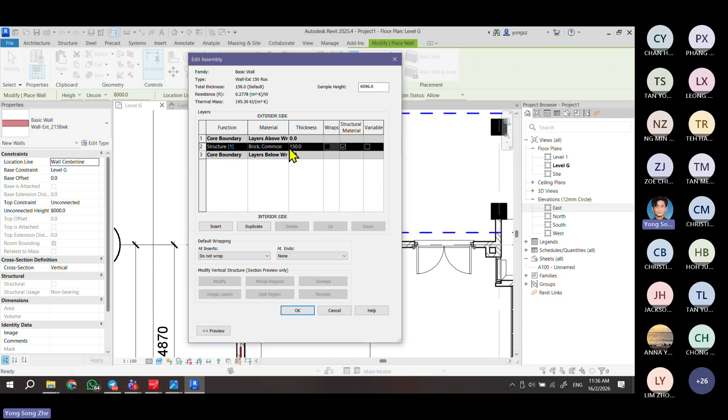Okay, now I only have this one layer of structure, it's correct. If you have multiple layers, you can select the layer and click delete. This core boundary is okay, just leave it, doesn't matter. So it's brick common 150. I say okay, I changed the thickness already, so now it's 150 under your own name.

So now, from the column, I can click to start the wall and then stop it at the grid or at another column. Okay, one more time, I click architecture wall. The shortcut key is WA on your keyboard, as you can see in the bracket here, in the intro brief. So WA, from the column I click to start, and then I click to end it.

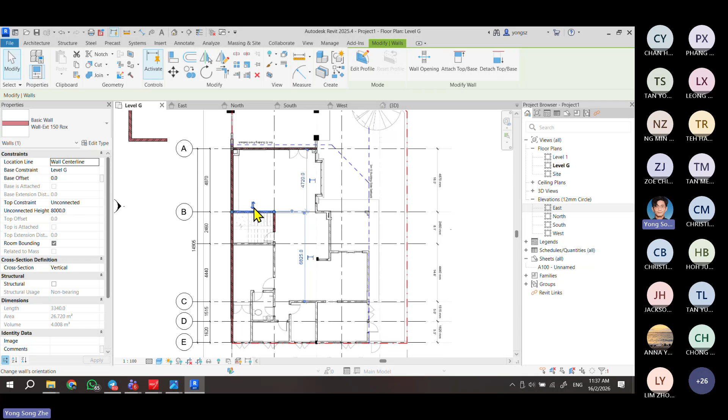So everyone, you shall complete your wall placement also. For wall placement, we will separate it into two types: one is external wall, one is internal wall. At least two types, you can have more than two because maybe your design is different. So for internal wall, this one I will delete it, I will do it separately.

Okay, so we have external wall. I go wall, architecture wall. We have external wall. Now, how to create one for internal wall? So I click edit type again, then I click duplicate. I create one for, I rename this one for internal wall, INT.

I say okay. I can remain, it's 150 thickness, I can remain. I say okay. So now I have another option, internal wall, internal. This one is to be used to draw the internal wall.

Okay, make sure when you draw your wall, you check here, it must be in height. And here it asks you how high you want your wall to be. The top constraint, you change it to level 1 so that it stops at level 1. So when you look at the elevation, currently you can see the wall is very high. This is a wall, right? It goes up to 8 meters, more than level 1, as you can see.

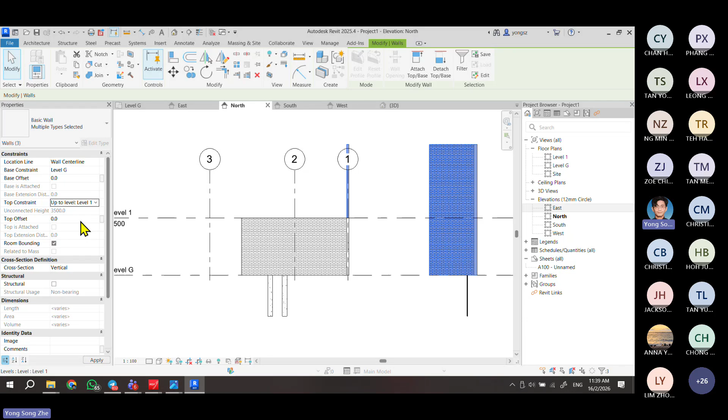But even after we draw, we can select them and change them also. I can hold control and click the items to multiple select them, then I change this to level, stop at level 1. This I can delete it, unnecessary one.

So you need to have at least 2 types of wall: one is exterior, one is interior. Next week, we'll learn how to customize the color and so on, the painting, the materials.

Okay, so for today's class, I mentioned about the UK library, right? We go to insert, load family, and then you can see this UK folder. This UK folder, for your information, where is it? If I go up a few folders, actually in my libraries folder, and then English folder, UK folder, and then it is here.

All the categories of items. It's like, for students who know SketchUp, especially architecture students, this is a bit like your SketchUp warehouse, but this is the default one that's already downloaded in your computer. So you have multiple categories of wall, columns, windows, human figure, plants, and so on here. Today we learn about columns, structural columns.

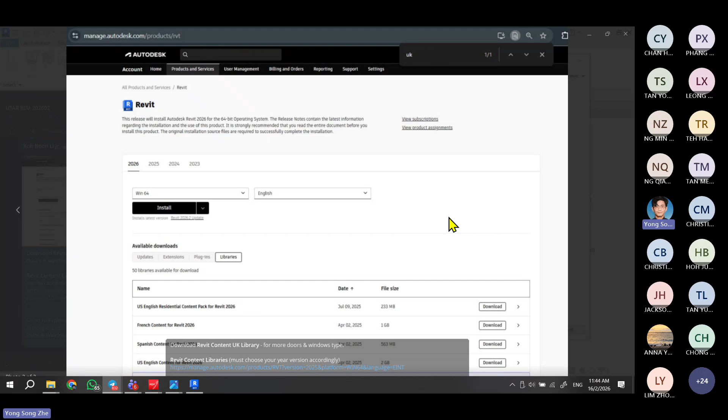Here, okay, yeah, you need to make sure you have signed in and so on. So you scroll down, you choose your version, you scroll down, and you go to look for the UK English content. It's about 1 GB around that, quite a big file, so need some time to run it.

Once you have downloaded it, then you need to go to your download folder to double click and install it. You just have to do it one time, and then in the future it will be always available. When you click in Revit, you insert the family, you can find this folder.

Okay, it brings you to the link. Go for your exact version. If you are using 2025, then you need to download the 2025 version. If you are using 2026, then you need to look for the 2026 UK library. You can search in Autodesk here also for the library folder. If you are using 2025, you shall not use the 2026 UK library, it might not be compatible. It has to be version specific.

So after today's class, by next week's class, we will look in and see everyone in the class. You have your image imported and scaled correctly, you have your grid position correctly, you have your columns added in with the proper size columns.

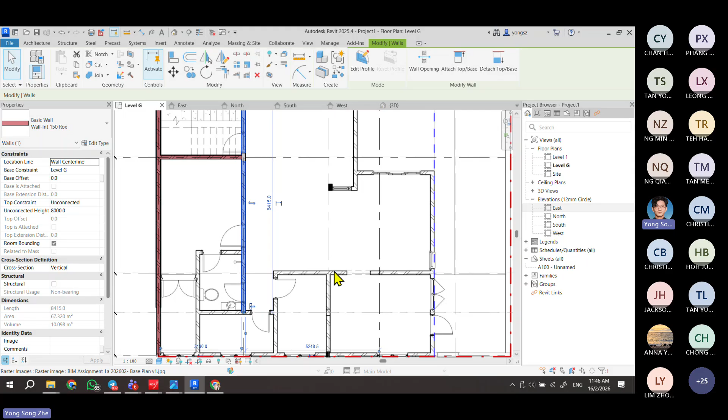So you need to think about where you want to place your living room, your kitchen, and your bedroom. You need to have minimum one bedroom, of course, and then kitchen, dining, and living area, and storeroom and so on. So you place your space now, you plan your space now.

Next week's class, because later next week we will add in doors and windows, we will add in your furniture, and we will add in the flooring and then the roof and so on. So this week, do it accordingly, following the progress.

Okay, go try to look for the UK folder instead of US. If you don't have the UK one, go download it, it's around 1 GB, as a link shared in my Telegram, our Telegram.